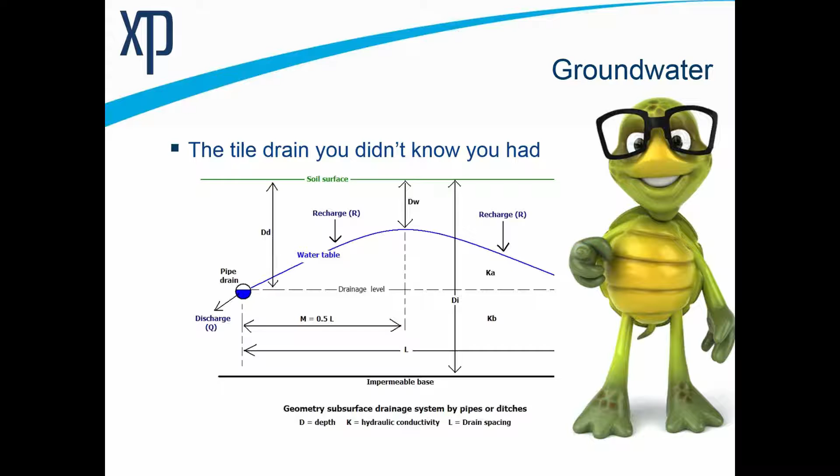So what might that look like as far as hydrographs? So this is a long duration, so assume this is several months of flow. So obviously dry is going to be 0, right? You'll have no flow under dry weather conditions. Here you can see what I'm calling saturated flow. Now this assumes that there isn't any industrial flows.

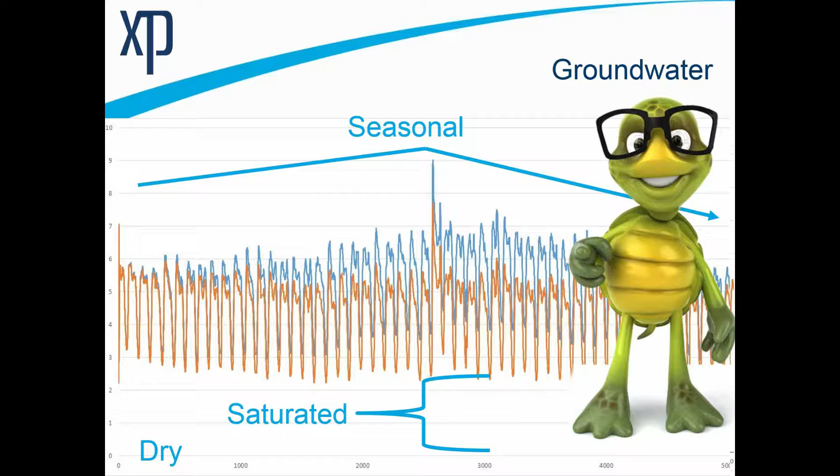What might that look like in, again, this physical idea? Well, if you can actually look into the pipe, it's going to be clear, relatively speaking, hopefully not as much of a quantity, and non-turbulent. So here's just an example of what you'd expect, right? It's relatively clear, and it's just kind of there.

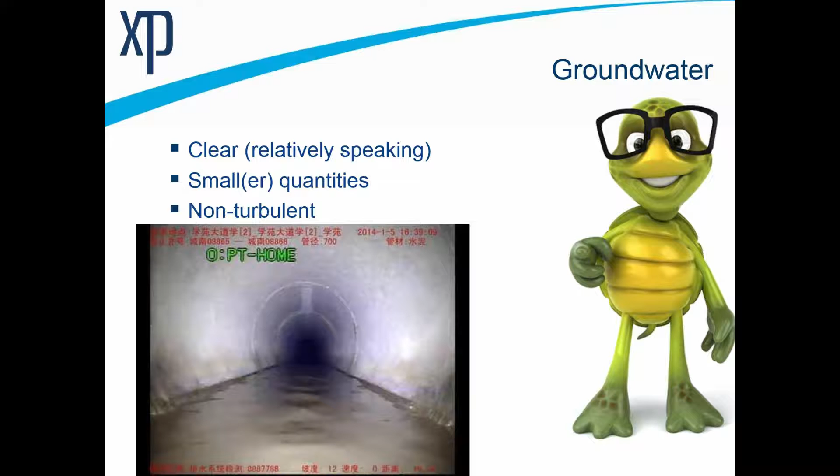In fact, I've seen this before doing manhole inspections in brand new neighborhoods. All of the lines are built, but there are no houses, or a few houses but no one lives in them. And you pull the manhole cover and you see a third of the pipe flowing full of water. Well, that water on a nice, bright, sunny day, and it's been sunny in Texas all through the summertime, is coming from groundwater. So that's something that you're treating, but you also need to be able to capture what's happening.

Okay, so now let's switch gears a little bit, and now we're talking about something that's directly related to rainfall. With what we talked about before, there's obviously a relationship to rainfall. You're not going to find groundwater in the desert, right? So you need to have some rainfall, but now we're talking about things that are directly related. The first one being infiltration.

So here's an example. You can see where infiltration can get into the system. You see some root penetrations in this lateral, so basically a leaky lateral feeding into the main system. Again, that's a private property issue. You also have some broken or cracked pipes or joints that are off. The base of the manhole may be broken. These are all things where rainfall can basically infiltrate its way into the system. But it won't be quite the same as inflow, which we'll cover in just a second.

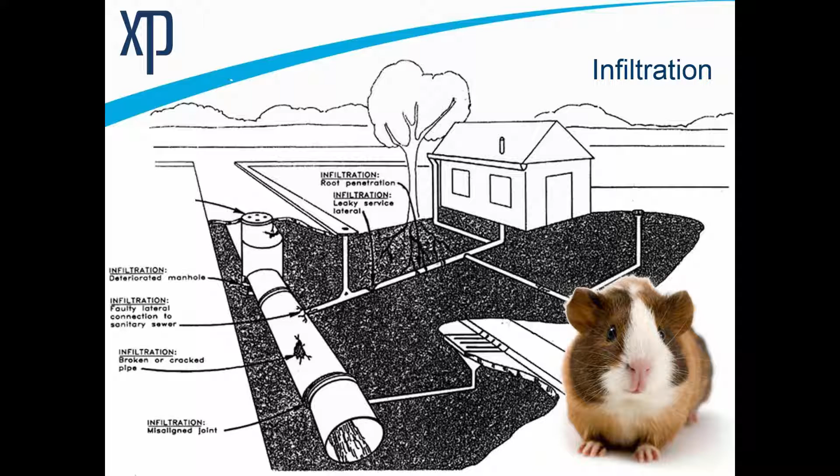It's going to be more turbulent wherever it enters. Again, you're assuming it's going to be clear, and you may have a larger volume. So here's a couple examples: the lower one is in a manhole, obviously, and the other one is in the pipe itself. So you see water squirting in through some type of defect or misalignment.

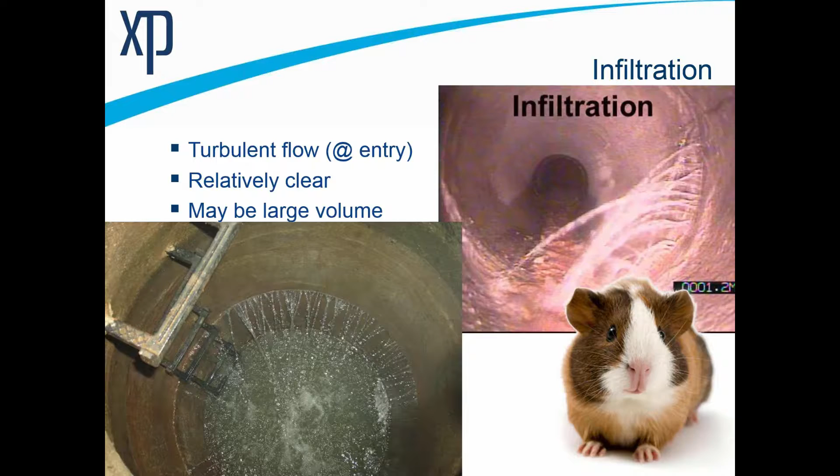And then you have inflow, which is similar, but basically the biggest difference being that inflow is a direct connection, whereas infiltration has to do a little bit of meandering, so there's some flow attenuation. And I guess if you had 1 inch of rain, that's inflow versus infiltration, you also have not only the attenuation or the magnitude, but the total volume would be less.

Well, if the manhole doesn't fit right or the pick hole goes through and through, you're obviously going to get some direct inflow into your system. Now there are other ways to address that. There are rain guards and there's some structural ways to fix that, but it certainly could happen.

So going back to the picture before, I think you may be able to guess where the inflow would occur, right? And so in this case, it's going to be the much higher magnitude response and a faster response. It's a somewhat stylized example because obviously there's a lot more rain occurring back to back to back. So it's not absolutely perfect, but you can see again the difference, right?

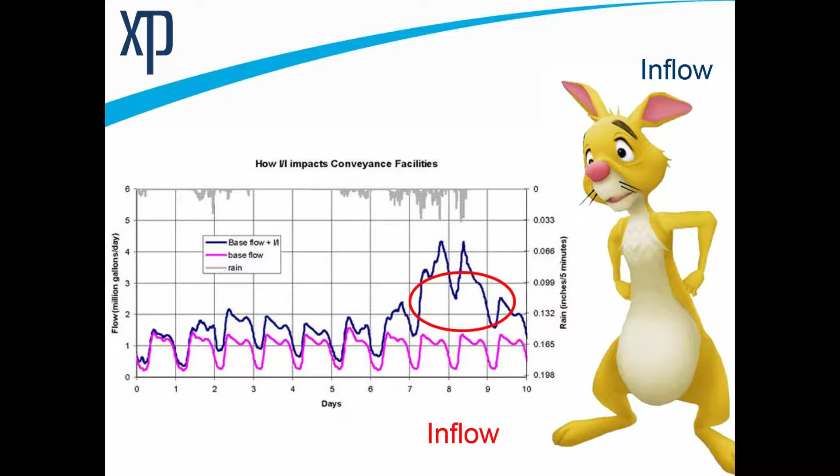So this inflow would have infiltration and inflow in it, but you can see just a much higher response back. As you can imagine, it's going to be very turbulent and potentially a lot of volume.

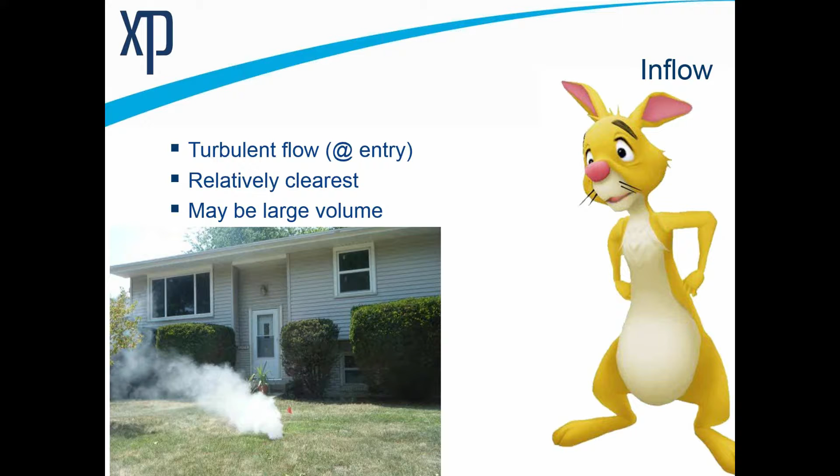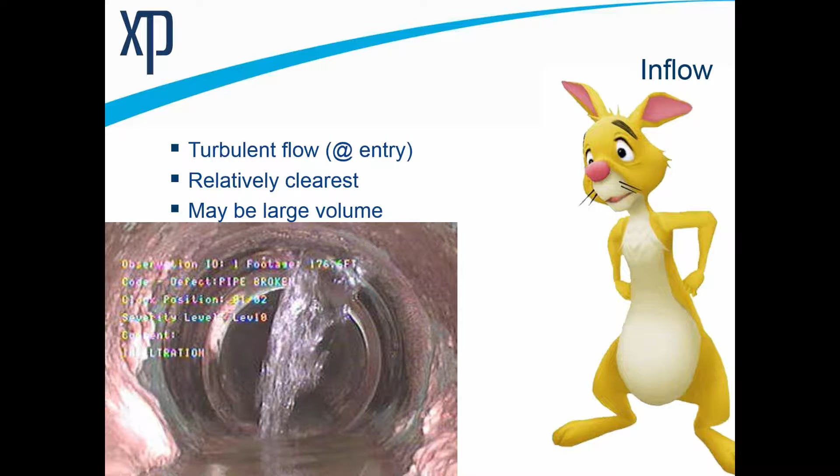And what might that look like in the system? Well, the lateral may penetrate, in this case, at maybe 2 o'clock, and put a lot of flow in. So that is direct flow and a large quantity of flow all in at once. So those are the three main culprits we're going to cover: groundwater, infiltration, and inflow.

So let's talk about how we're going to model that, right? It's one thing to know that they exist. A lot of us know that. We kind of have a little idea of what those things are, but how are we going to model that? So you may say, well, there's going to be some one-size-fits-all.

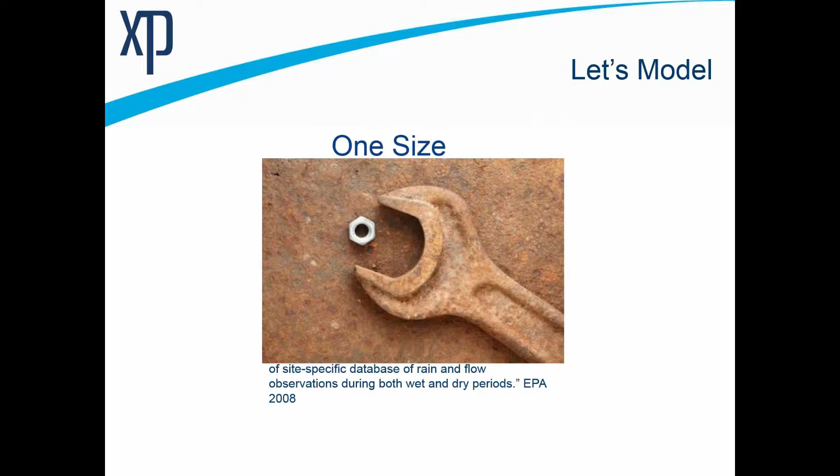Well, coming directly from the EPA, and I'll paraphrase, there is no RDII method that's universally applicable because everything is different, right? So RDII, again, is rainfall-derived inflow and infiltration. So you can't really pick one method that's going to do everything. It's just not a one-size-fits-all method, but that's okay. We can cover some different methods, and that's what we're just about to do.

Before I get into that, there's a couple methods that I would not encourage you to use unless you have to. Now, there's always a reason, there's always an exception, so by all means, I'm not saying these aren't applicable, but if you can avoid them, the two of them are kind of the decimal multiplier method and then a secondary persistent pattern on top of dry weather flow method. If you can avoid those, that's ideal.

So the decimal method is what I call the "it's not not believable" approach. And the secondary persistent pattern is kind of the "it works 100% of the time, 20% of the time." Or, you know, a broken clock will be exactly right twice a day type approach.

So the decimal multiplier is, I have some value. It may even be a historically contexted value. So perhaps I know that my wastewater treatment plant or my outfall meter under a big event registers 4 times as much flow as average daily.

So my wet weather is 4 times greater, and we all like numbers, and we all like to have something distilled down into a value. So we say it's a 4. So then I will just take my average daily flow in the entire system and multiply it by 4, and that will be my wet weather. There's a few reasons that's not ideal. Again, there's reasons that you may have to do that, but there's reasons that's not ideal.

Principally, if you're just multiplying it by a number, even if it's not completely arbitrary, you're not able to determine anything about the volume of the flow. So that means you can't really make any kind of assumptions on the system storage or anything that happens in any of your facilities. And you also can't make any future considerations. In other words, it's not tied to anything physical. I'm going to multiply it by 4, whether it's 2 inches of rain or 10 inches of rain. It's just a number that's there.

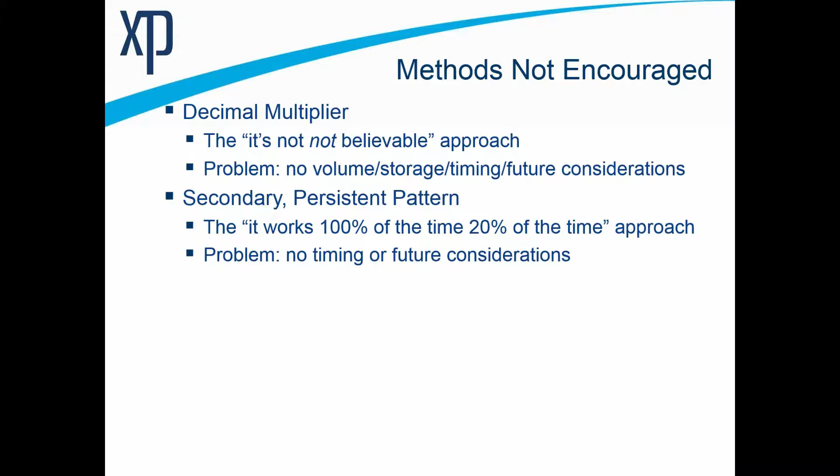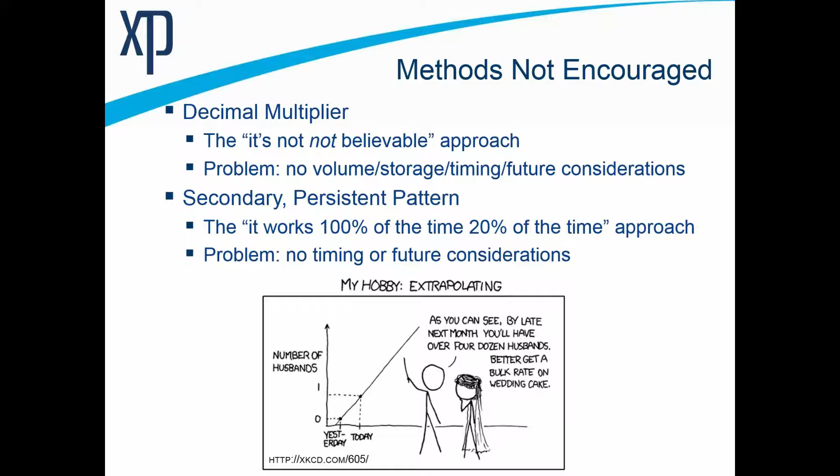So those are 2 that we're not going to cover. They're really all extrapolation problems where you have 1 or 2 little bits of data, and then I'm trying to see what might happen in 5, 10, 20 years from that 1 or 2 pieces of data. And that can be very problematic, especially, a lot of these models are tied to fairly large capital decisions. So obviously there's a lot of logic involved and there's a lot of engineering, but the model is one data point there. So you really don't want to have it projecting a really big pipe or really small pipe without something more physically based.

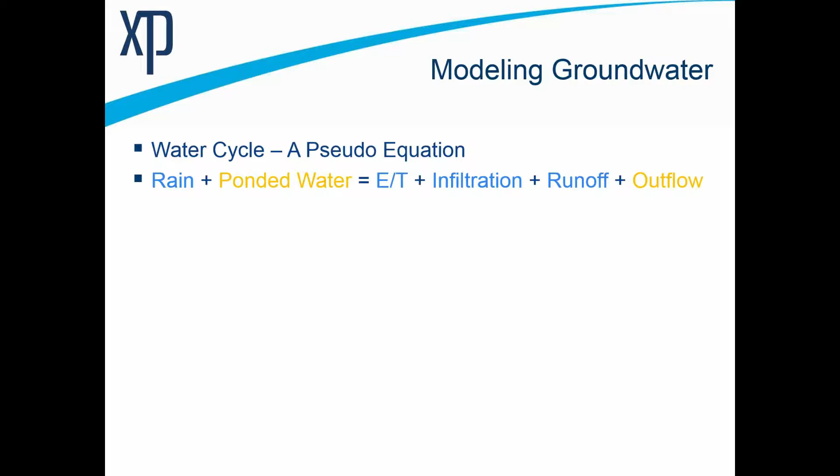Okay, so modeling groundwater. So if you are a hydrologist, I apologize, you're not going to like my pseudo water cycle, but I'll say this, that water will fall out of the sky or already be on the ground in some aspect, and that's on one side of the equation. What happens to that water? Well, it can be evapotranspirated, so it can disappear back up into the sky. It can infiltrate or percolate down into the water table, into the groundwater. It can be runoff or it can be outflow / storage. In other words, it can stay in the pond, right? So a very simplified approach.

So if I just highlight the red things there, infiltration and outflow, those are the 2 ways that you can end up affecting the groundwater table. And that's what we're trying to do, is affect the groundwater table to determine what flow might actually leave the groundwater table and enter into our system.

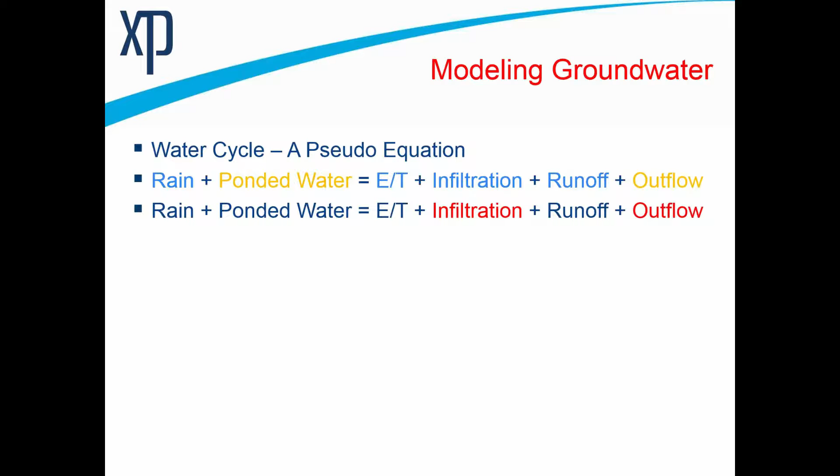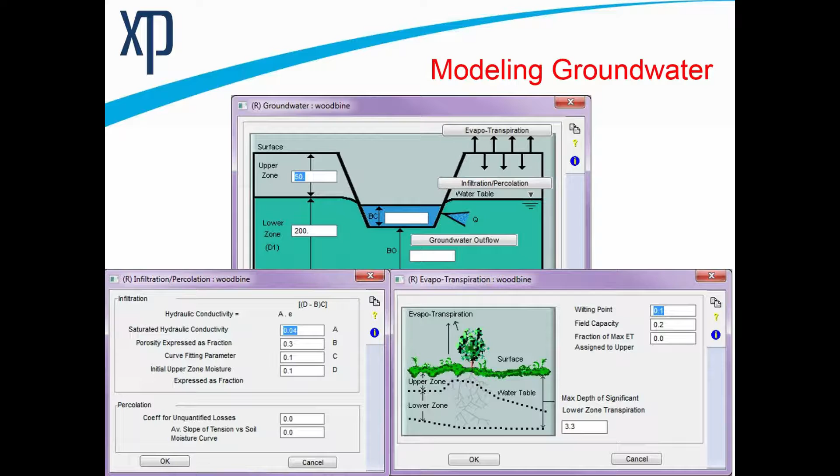Now note, you're already at about 10 variables. So we're starting to add more and more variables because the process is not necessarily simple, right? So it's not overly complex, but there's lots of different variables that can impact what happens in the system. And the final thing, of course, is the actual outflow itself. So how does flow leave this boundary condition? So now we're up to 15 variables. Bear that in mind. If I can foreshadow into the future, if you're trying to calibrate that, there's a lot of different things to change.

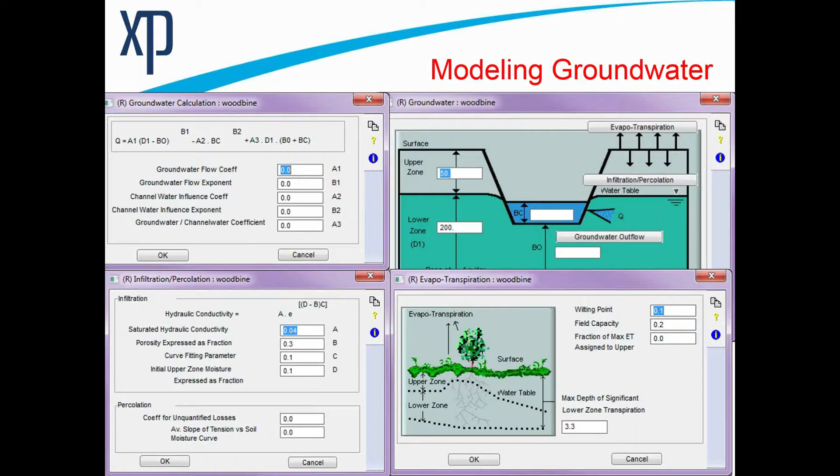The last thing here is the boundary condition. So you can use a constant boundary condition, or you can actually vary it based on the conduit depth. So remember back to our physical idea.

Well, obviously, if your groundwater table is at 200 feet below ground and your pipe is 15 feet below ground, perhaps you don't need to worry about groundwater to the same level as someone whose groundwater table can reach almost to natural ground and their pipes may be 20 feet below ground, and that may change over time. So the level to which you would use groundwater and how you'd use this kind of interface would vary.

But another thing that people will do, if you go to the effort of calibrating it, it's kind of a brilliant approach, I would say, if it's applicable to you, is you have typically historical rainfall data stretching back decades. You don't have flow data, so you just have rainfall data.

Well, a lot of modelers will choose to run, say, 50 years of rainfall data before they ever even worry about what's happening with the actual flow, and they'll become quite good at fine-tuning the calibration, fine-tuning the groundwater depths. Perhaps they have monitoring wells, etc. So they do a lot of pre-work to even getting to the point of doing infiltration, inflow analysis. And that's part of the reason that I wanted to include groundwater here.

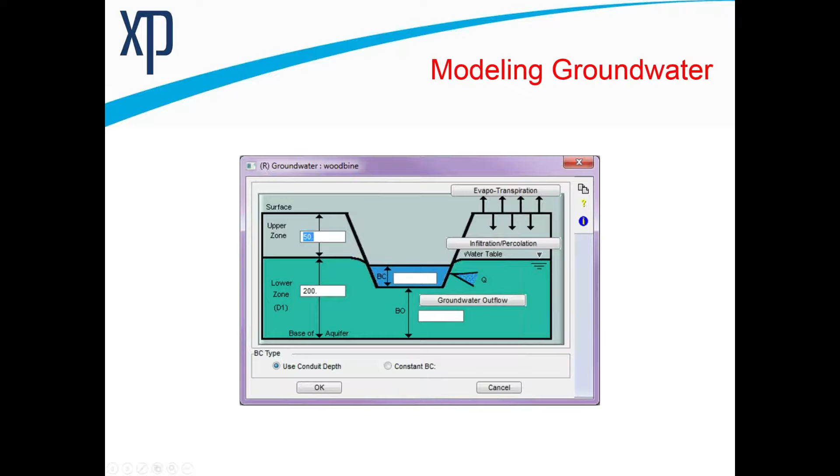So modeling infiltration. There's a couple ways to do that, and the method I'm going to show you here is the RTK method. And so RTK stands for 3 parameters that we're going to cover. The first one is R, and R is the fraction of rainfall from what falls out of the sky that gets into your system. So the simplest way to think about that is a higher R is going to give your triangular hydrograph a higher peak. The value is going to be higher.

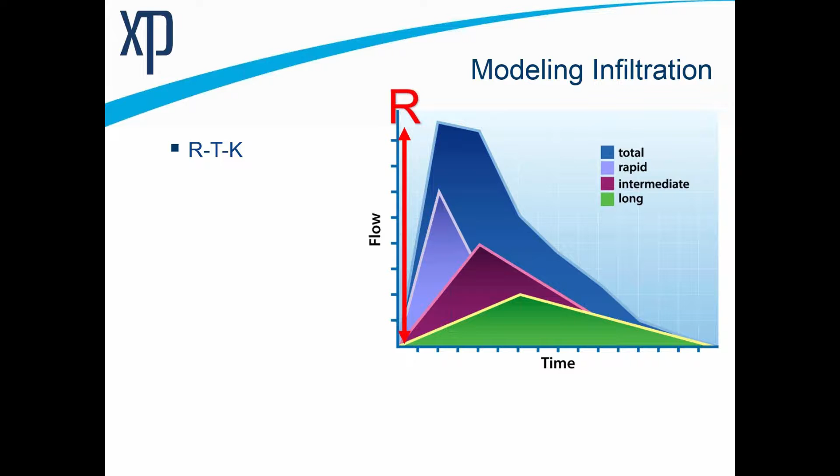And if you're not someone who does a lot of hydrology, these are standardized unit triangular hydrographs. So you need an R to figure out how tall the hydrograph is going to be. And then you also need a T, and this T parameter tells you how long it takes to go from rainfall event to peak. That makes a difference too. And then the final thing is kind of this final shape in the triangle, which is this ratio of lead arm to lag arm.

So what that might look like. You can see in this example there's a total, which isn't a hydrograph anymore, but a different polygon shape, and that's made up of 3 different responses: a rapid, an intermediate, and a long. So if you've not used this before, you may be able to think ahead and say, well, even though I'm talking about infiltration right now, if I had a really big rapid response, that would probably be inflow. And if I had a really, really long response, that may not be groundwater, but it may be like a really slow percolation. Not an impact from the groundwater table, but definitely a slower impact.

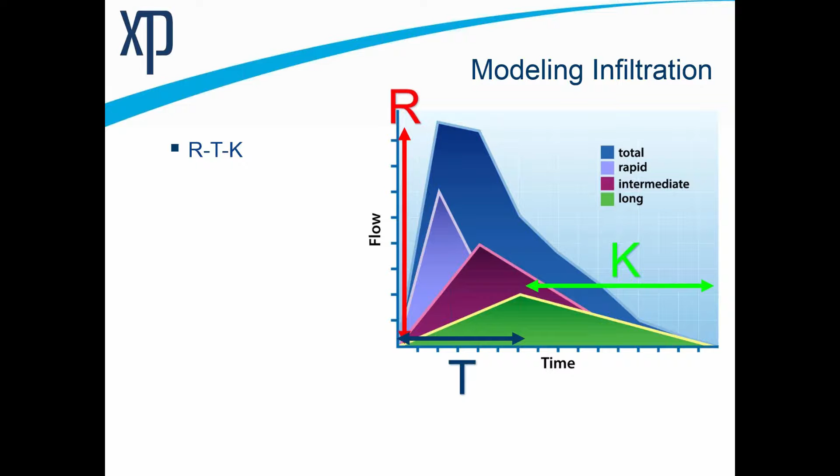And you would be right. So certainly you can do that. So you can use this method both for inflow and infiltration, and in fact concurrently, and a lot of people do that. But just for the purpose of me talking about infiltration, I'm covering just the RTK method.

Now I did, I don't know, maybe a 45-minute talk just on a program called EPA SSOAP. I believe that's the sanitary sewer overflow analysis. It's a toolbox that EPA put out. It's a free piece of software. So if you use that link, you can go to it, and it's 45 minutes of me talking through how to use the software, because the software works great, but it doesn't have a lot of user guides or tutorials. It has nothing to do with XPSWMM. It's just kind of our helpful guide to you to know how to use it. And what this toolbox will do is help you calculate this R, T and K. We'll cover that in just a second, the next slide, of what that looks like.

But just because I don't have the time to go into too much depth, I want you to have some tools to be able to help. So there's about a 45-minute talk just on that. After that, there's actually another talk, maybe half an hour or so, on how you could use EPA SSOAP with XPSWMM. So we do talk about some workflow methods for how to interface the two, but you'll get just a talk on one or the other. So by all means, use that.

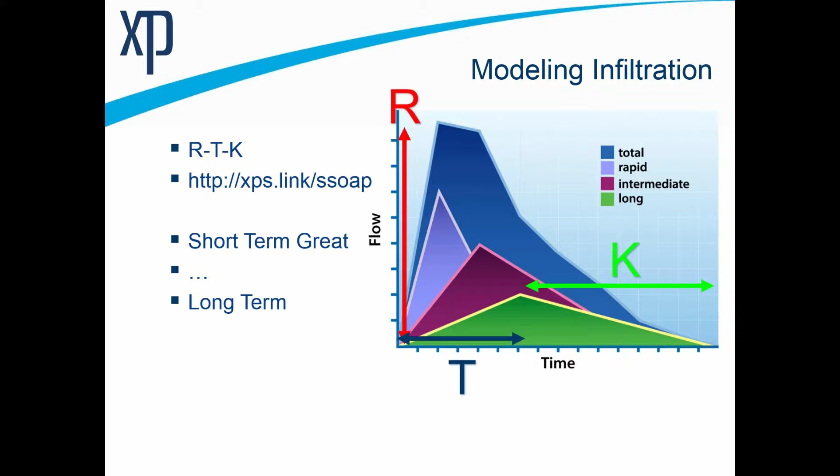So again, if you're very pragmatic, you may say, so for short term being like one single event, that makes a lot of sense. But what about long term? In other words, if it rains 1 inch today, and then it rains 6 inches tomorrow, well, I would intuitively expect that system to respond different than if it just rained 6 inches tomorrow, right? And so that is this problem of antecedent moisture, right? Big issue. So we have a way to fix that with the RTK method.

But we do have antecedent conditions. So basically what we're doing with antecedent conditions, we're trying to handle that. So if we treat the catchment, or the area that we're trying to apply all this to, as kind of a reservoir, then we know, like, do we have initial abstraction? So how much water is going to run off versus stay? How much can we store? How quickly are we depleting that storage? So we have some way to be able to run a more continuous simulation, which is really important.

If you don't do that, and I think everyone's been there at some point in their career, you end up with really strange looking graphs where you have 1 inch of rainfall at even maybe the same intensity, that inch of rainfall producing a bigger response from the system than 3 inches of rainfall. And that's really hard to explain if you don't have a way to handle these antecedent conditions.

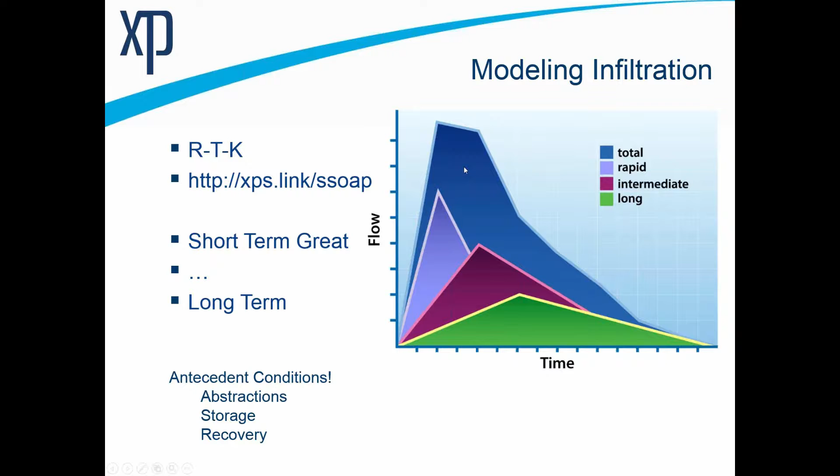What that looks like in more practical terms, and this is again a screenshot from XP, is you've got the R, the T, and the K. So that's that fractional rainfall, the time to the peak, and that ratio of recession for short, medium, and long. Those are the columns. And then you have these abstractions in storage and recovery rates of storage, again, for short, medium, and long.

Basically, once you determine what those values are, and it's kind of nice, it's a parametric way to determine what happens. Once you determine that, you can attach a rainfall to it. If you add in your sewer shed area, you're good to go, right? So if you have that, and let's just assume I wave my magic wand and it's calibrated. Well, now, versus the methods we talked about not wanting to use as much, different rainfall events, the model will respond differently because it's more physically based now.

You will get different RTK values for different rainfall events because they will still respond differently. And that's, again, something that EPA SSOAP will handle well, where you do some generalized statistics to determine what those values should be.

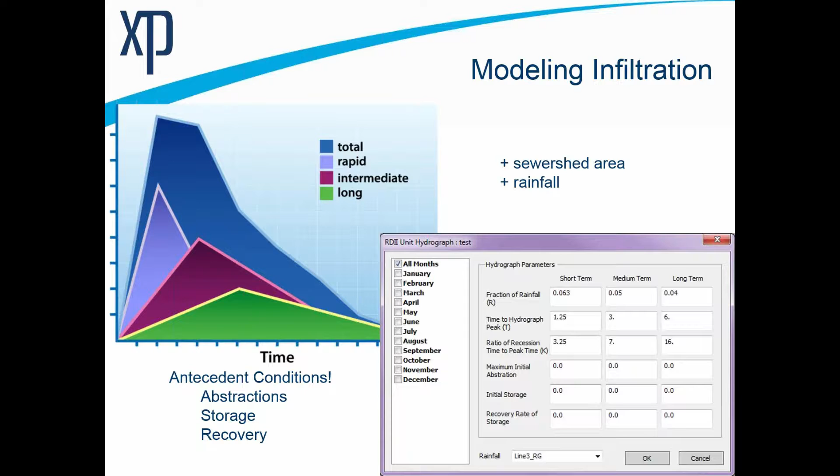So inflow, again, you could use either one of these interchangeably, but let's talk about a different way and apply it to inflow. So I kind of mentioned before in the groundwater example, if you're a hydrologist and you're really good at the water cycle, well, it's kind of tough for you to be really good at the water cycle and then have to go switch over to this parametric RTK thing, right? So now you're very empirical, and while it's been around for a long time, it's not the same as some of these equations and approaches that have been around and you may be more comfortable with. So is there a way we can do that? And the answer is yes.

And this is really good if you're doing like a dual master plan. And by dual master plan, I mean if you're doing a stormwater master plan and then a sanitary sewer, and I don't mean they have to be concurrent. If you did a stormwater master plan last year, someone invested a lot of time into determining how the rain is falling out of the sky and how it's being routed. So there's a way that you can use some of that rather than just reinventing the wheel.

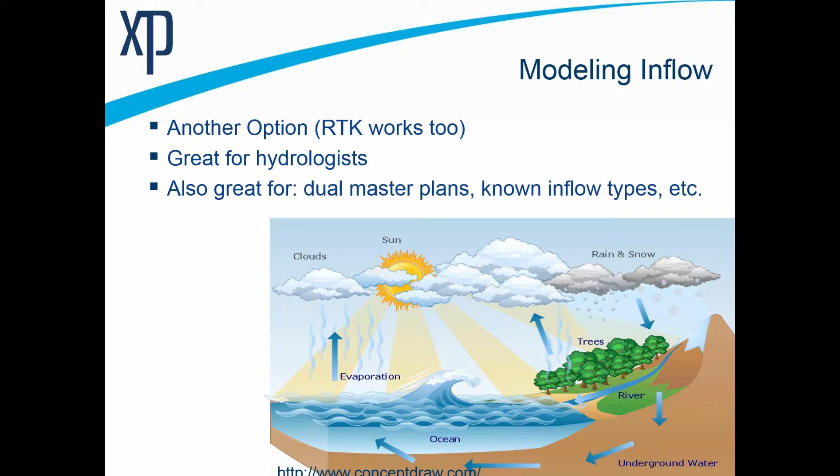Also, if you know the way that some of this inflow occurs, in other words, you do know you have dual drainage and you do know the extent of where the problem areas are a little bit better, then this is a really good idea. Basically, it's relatively straightforward, especially once you have the hydrology done. So you determine how the rain, where the infiltration is, and how everything is routed. So you go through that effort, and so in like XP SWMM, you might pick any of the 20 or so different methods, and you've kind of honed in and nailed it exactly right.

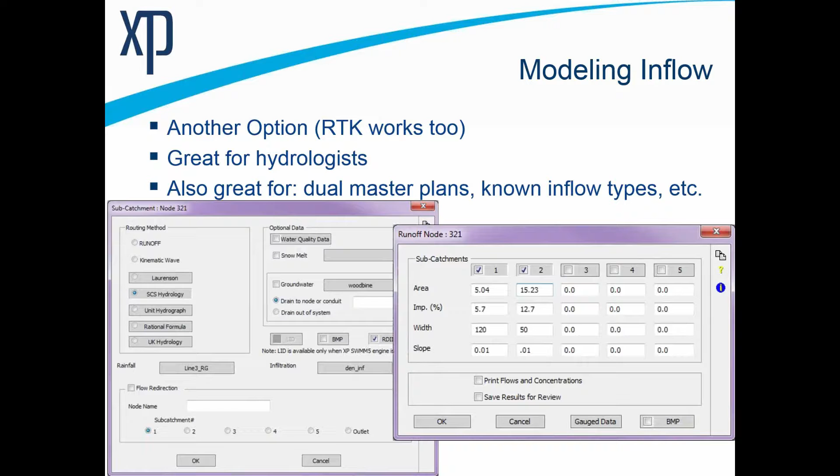You're able to really finely discretize your subcatchments, so you know your area and your impervious, you're kind of lining everything out. And then you do this nice final step where you just say, I want to interface some of that flow from my runoff to my hydraulics. And so kind of a loose corollary would be like, this is the R from RTK, but I'm using all of my routing methods to better determine the T and the K.

And then I'm attaching the R value by saying for this specific node, this specific amount of interface. So this is a 5%. So 5%, whatever happens, is going to interface in. And then you can further route it through your hydraulics.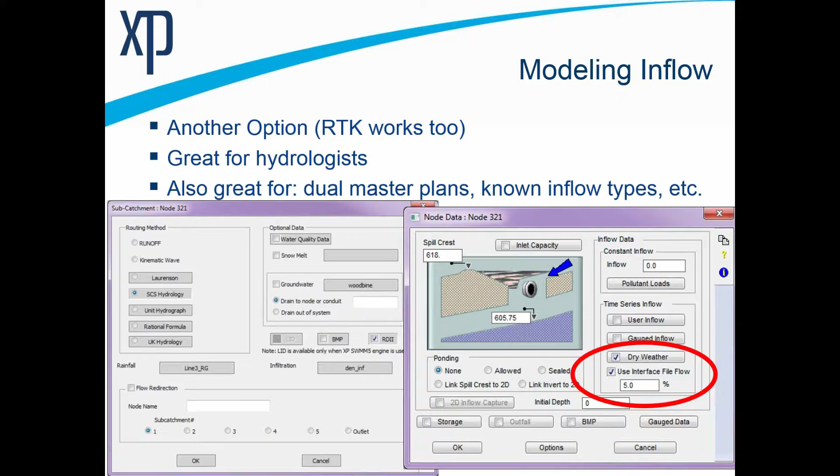So there are other methods out there that I just, in the interest of time, didn't cover. One of them I've seen before is the antecedent moisture method, which is kind of a parsimonious method. So basically saying I can take other physical parameters, say not just rainfall but temperature, and I can come up with a good predictive model based on that. You also may have a really long polynomial kind of trailing moving average method, which is more of a statistical inference on what's happening.

Or you may have your own localized empirical method, right? So perhaps you have something either you developed or you were told to use that works for your area really well, because we all know that Central Florida is going to act different than Eastern Oklahoma. So you may have your own method there.

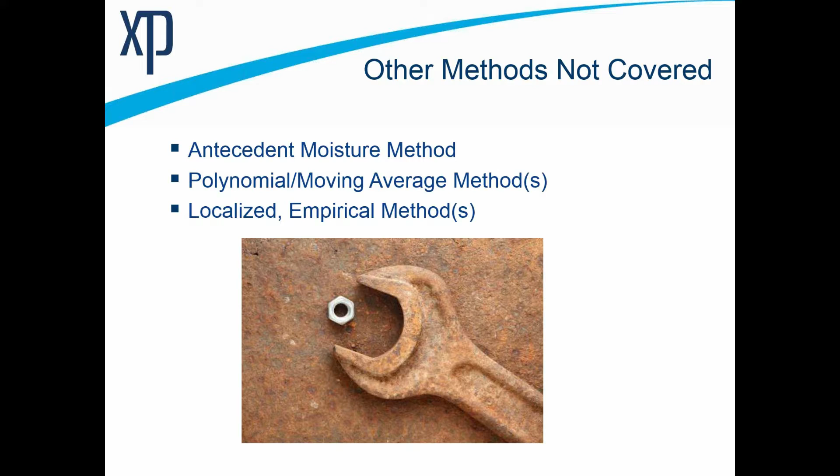In fact, I'm interested in knowing what methods you do have, and to keep some of you awake, I'm going to try to launch a poll on what methods you use. So I put a few in there, right? I've covered some of them, and then I have a big box for other. So go ahead and take a minute and vote if you can. You should be able to vote more than once, just on what you use when you're tasked with doing a wet weather analysis.

All right, enough people have voted. That'd be a passing grade in one of my grad classes, so I'm going to close it now. And let's see if I can share it. Hopefully you can see that. So it's kind of what we'd expected. It's a good collection between RTK and hydrology, with a lot of you using the multiply and pattern, and some of you needing to use groundwater. Excellent.

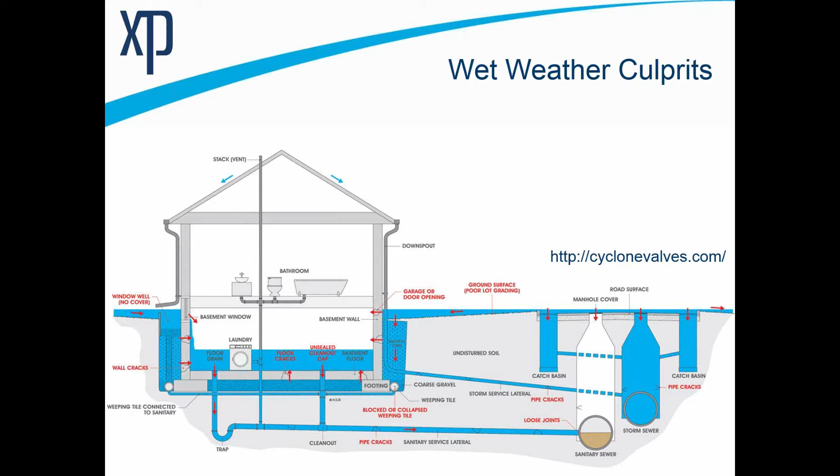So let's take kind of a step back. I kind of went right into how to calculate this on a pretty specific, node by node level, right? And so you remember this graphic where we see all these different places where flow from one house could enter in. So let's think about that in a different way. This is all conceptual, but I think you'll get the idea.

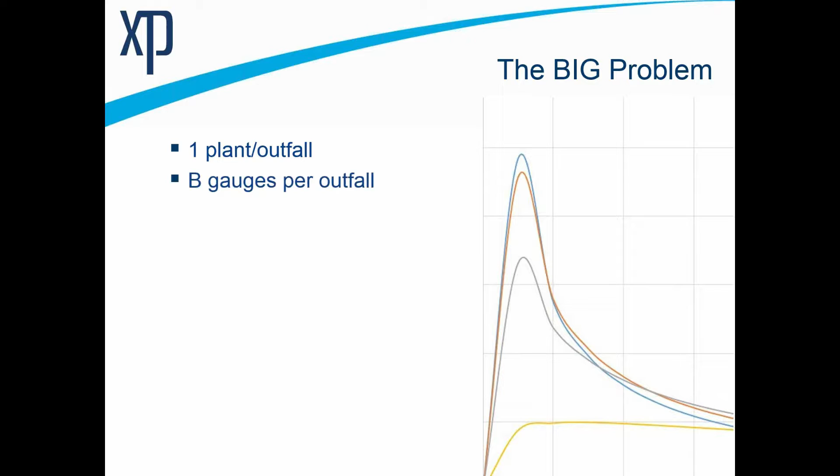So let's assume that some of you have more than one treatment plant or outfall, but if you do, you just pick one. Pick your favorite. Everyone has a favorite. So pick your favorite plant or outfall, and let's assume that you have a variable B. How many gauges exist in that outfall? So in this example here, let's say that it's 3. There's 3 gauges, or meters, measuring flow into this outfall.

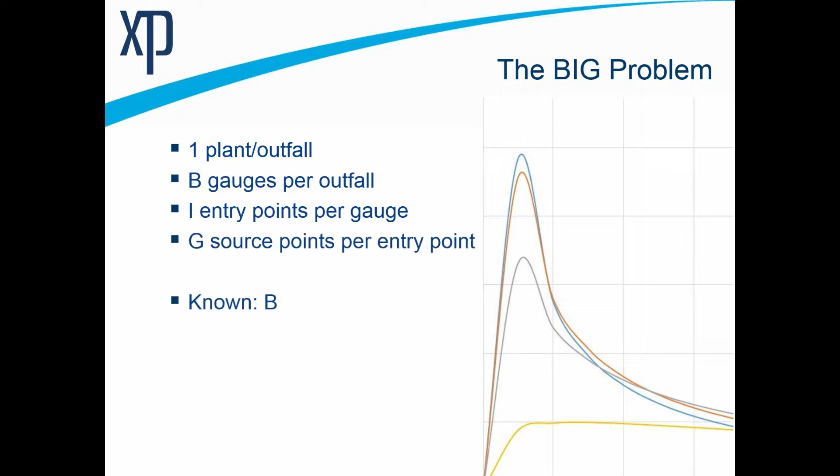Well, for every one of those gauges, there's this I, the number of entry points. So that could be manholes, it could be laterals, right? Those are all entry points, and there's a lot of those. But there's this G variable, source points, for every entry point, right? So we know B, we theoretically have data on this gauge, let's hope, but we don't know the BIG, right, which can almost be infinite. So that could be daunting, right?

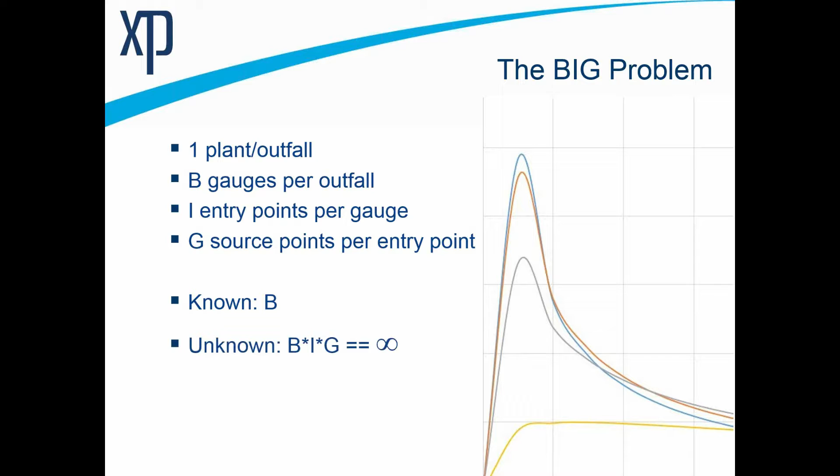So what are we going to do? How do we keep that from being a really big problem? In fact, there have been some studies out there, and we've done our own surveys asking how big of a problem is capturing our wet weather? How big of an issue is this in your project? So I have one more poll for you, and the question is, what % of your project is related to figuring out wet weather? So don't worry about calibrating dry weather. It's not as hard. If you're thinking on a fee basis or effort basis for you specifically, how much of that is related to just the wet weather delivery of sanitary sewer?

All right, I'll close it and let you see it. It's a pretty good split, actually, pretty much all around the board. So for some of you, it's not that big of a problem, and that may be because your system is well built, or because that's just not the focus of the project you're working on. It could be lots of reasons, and then it ranges all the way up to, hey, this is a big problem, just trying to determine what it is. And this is unrelated to fixing the problem. It's just trying to determine the problem itself.

Okay, so I'm going to try to give you a little bit of practical advice if I can. Easy for me to say, right? No longer having to do these, but let's give some advice. The first thing is a flow chart I sketched out on how I would approach one of the biggest problems, which is determining the focus of an individual area. In other words, let's say I love RTK and I'm going to apply it everywhere. Well, what does everywhere look like on an RTK basis?

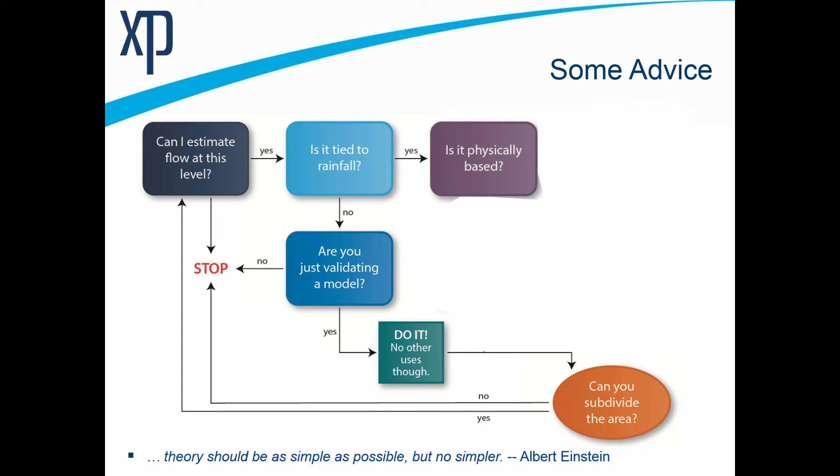So is it physically based other than rainfall would be the last question I would ask. And so there's two options, of course. So if it's physically based, like if I have some physical reason for knowing that, so in my easy example here, a sewer basin tied to a meter is obviously physically based. I should totally do that. I should totally subdivide it to the meter basin and then consider subdividing it into something smaller and flowing through this flow chart again.

If it's not physically based, so it has some reliance on rainfall, but there's nothing else really physically based on it, I would probably do it, but I would be really careful about conditions. And a lot of times what I mean by that is, if I don't have any way to tie the amount of flow that I expect to see to something, what's a good example? If I don't have it based on, say, number of manholes or the type of pipe or the condition of the pipe, I will still get a good answer for existing conditions.

But if one of my projects in 5 years is to slipline that pipe, how am I going to make a change? I need to be very careful because I've changed the physical conditions of the system, and that would necessitate a change to how wet weather interacts with my system, and I haven't built in a way to handle that. So it's just something to be mindful of. And again, I would just continue to cycle through this over and over again.

Once you've reached a point where you really can't divide it logically or practically any smaller, then I would say, all right, I know what the different factors are, either through hydrology or through RTK. I need to be able to calculate what they are. So practically speaking, what does that look like a lot of times? Well, in the simplest forms, it would be some type of geometric application, like a Thiessen polygon, Voronoi polygon application of manholes based on sewer flow.

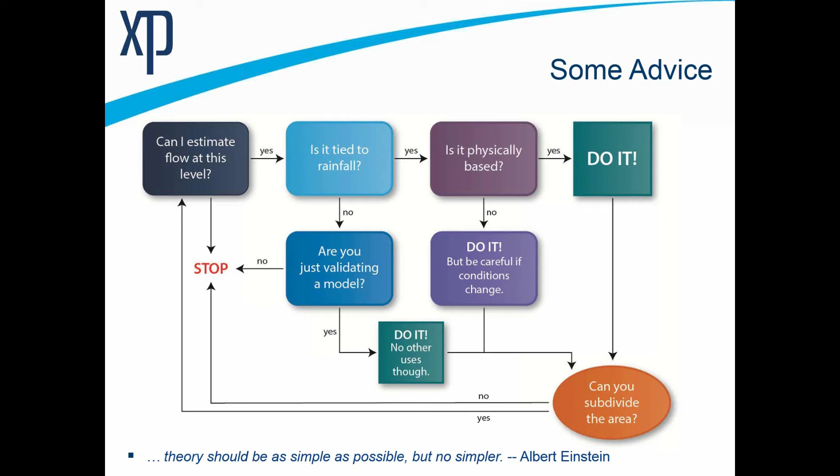So that might be an example where if you did take the R value from your RTK, or you just took the magnitude, the peak value, it was either a 0, so there was no wet weather infiltration or inflow, or it was like a 50, and you have no data to support that. Well, you're outside of just physical, logical, what's supposed to happen. So we don't want to be there. So we want to make sure we at least get to something that's reasonable.

That's again why sometimes the decimal multiplier will work, sometimes it won't, because it just depends on the physical limitations. But you also don't want to be in kind of bad logic land past what error limits are. So of course there's error limits in a meter. So if you're paying a vendor or you have your own meters, you'll have a small error on the actual meter itself. Not only what it's reporting, but exactly what the hydraulics are in the area.

It's a small number, but consider, let's say again that we have a wet weather event that's shown to be 10 times, peak on that day, what dry weather is. Well, by its very definition, we kind of have an error of 10%, right? Because if that happened to occur during peak dry weather flow, the total flow is different than it would have occurred during a regular event.